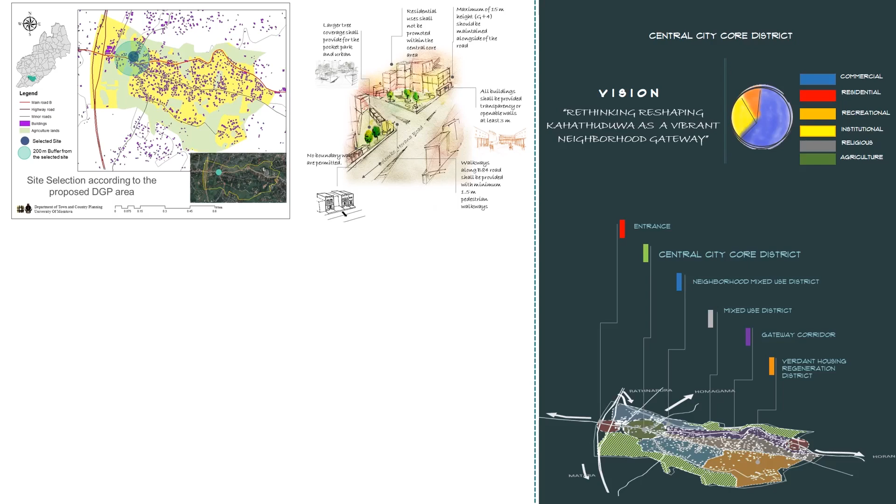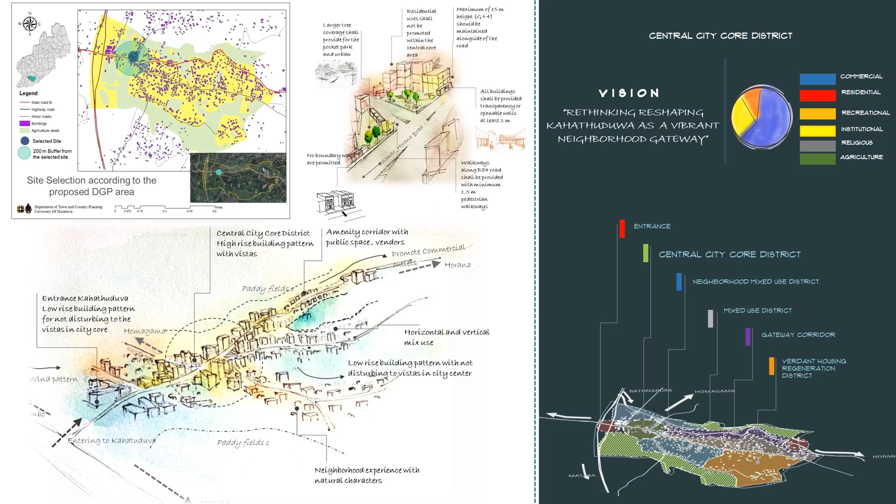Understanding this development pressure, a development guide plan was formulated to regulate development activities. According to this, the selected site is located in the central city core district, which will be the key commercial and service point of Kahathuduwa. It is expected to have a convenient and active city core while accommodating a range of commercial activities.

Considering the entire Kahathuduwa area, these are the adjoining land uses.

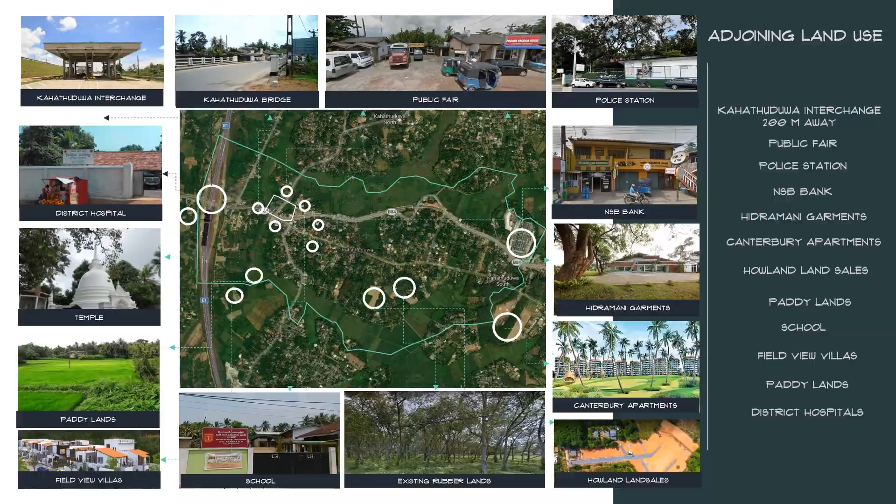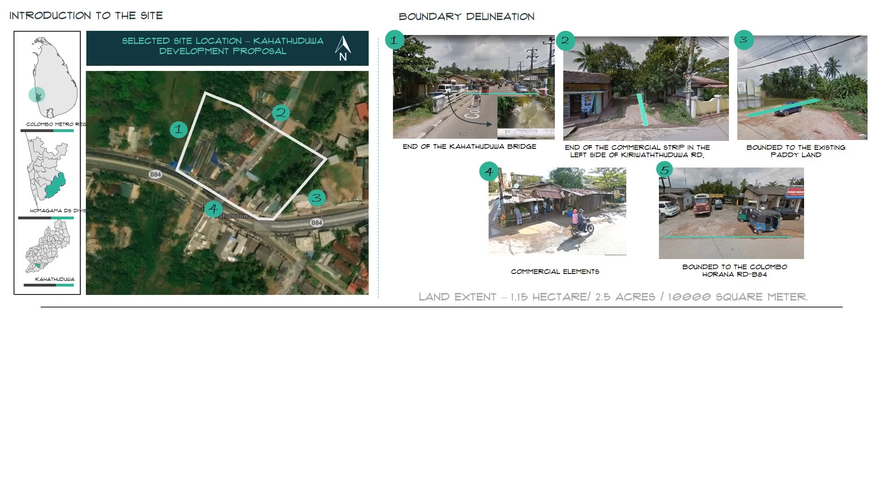The selected site is a 1.15 hectare land located beside the Kiriwaththuduwa road. The site, which includes an existing public fair, is owned by UDA, while the other side is owned privately. These drawings emphasize the existing condition of the site. Facing the Colombo-Horana Road, the land is occupied by the existing public fair of Kahathuduwa and some retail activities.

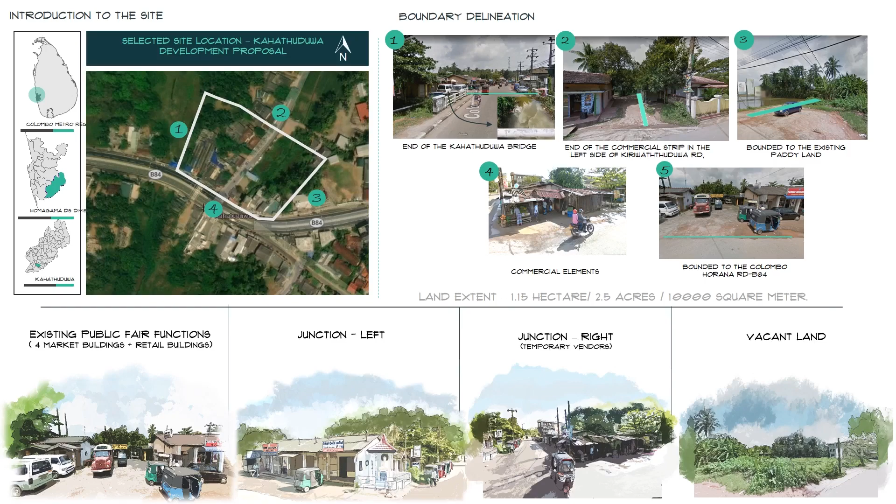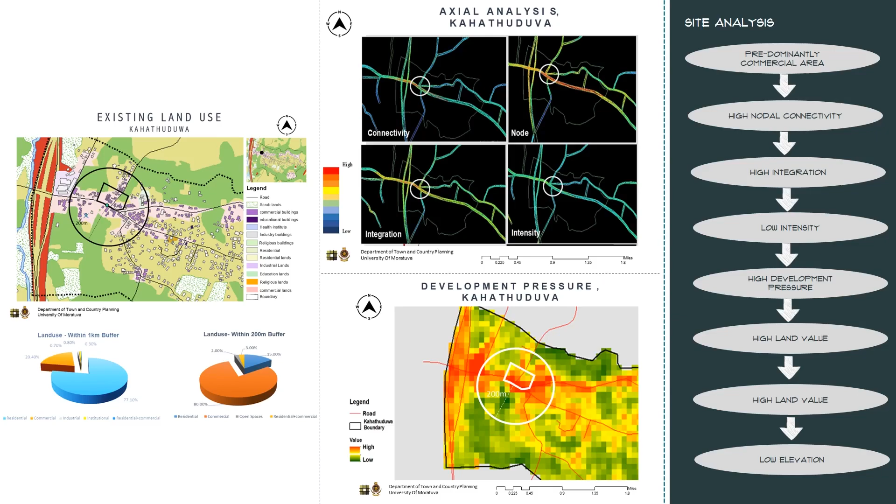Moving on to the site analysis, more than 80% of the existing use of the selected site is allocated for commercial activities. Considering a 1 kilometer buffer, 20% of the total land is allocated for commercial use. The nodal connectivity and integration of the site is comparatively high, though we can see less intensity in certain areas. According to the DGP, the site is located in a place of high development pressure with potential to develop further in the future.

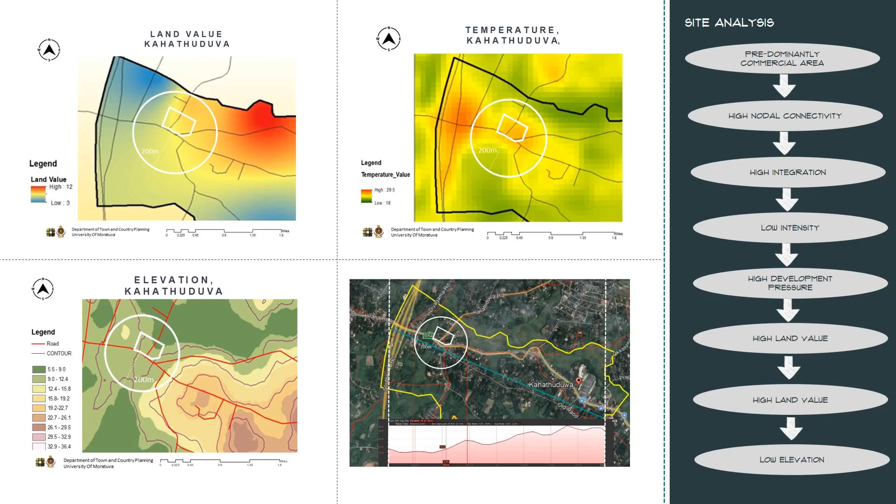The land values are drastically increasing within the last 2 decades. Considering the environmental character, the temperature of the site is comparatively high and this land plot is located in a low-lying area.

Accordingly, 3 alternative proposals were evaluated to select the best use for the selected site. The fitness for the DGP, ability to cater to the future development trend, and potential impact on neighborhood areas are some key concerns. After evaluating them using multi-criteria analysis, Commercial City Centre Development was identified as the best proposal for the site.

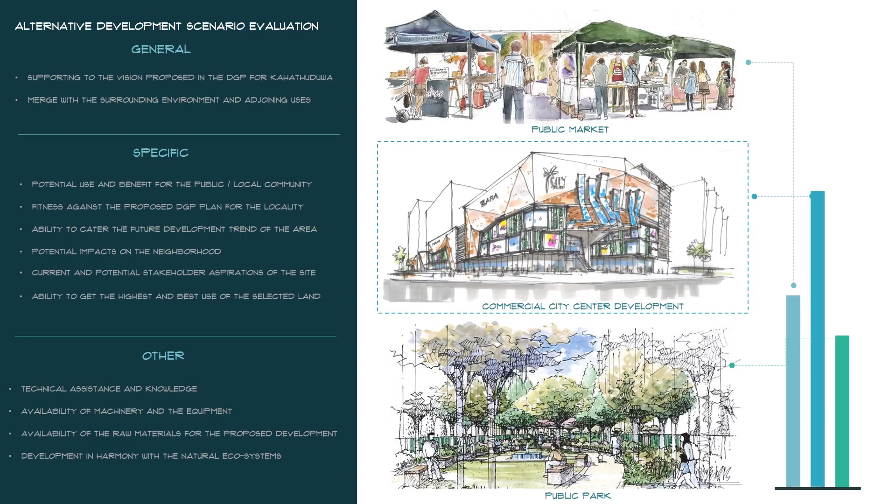Moving on to the need for this project in Kahathuduwa, as previously said, this site is located in a strategic location. Proposed transportation development, increase in residential demand, and apartment concentration reason out the need for upgraded commercial activities in the central city core. Moreover, high consideration has been given to the central city core, where the plot coverage is 60% with a maximum height of 15 meters.

The high concentration of population will demand high quality commercial and service utilities. Moreover, there is a need for harnessing a sense of place, ensuring public recreational facilities for both residents and outsiders. But in the existing situation, lack of commercial and service facilities, inadequate open spaces, inconvenient access for day-to-day shopping needs, and linear ad hoc development can be seen as the problems of the selected site.

Understanding the future demand and the gap, 3 project components will be selected to develop in an integrated manner: to develop a node as the main landmark, to provide convenient access for high quality commercial and service needs through a city centre development, and to provide quality open spaces integrated with the surrounding environment. These are the main 3 components of the project.

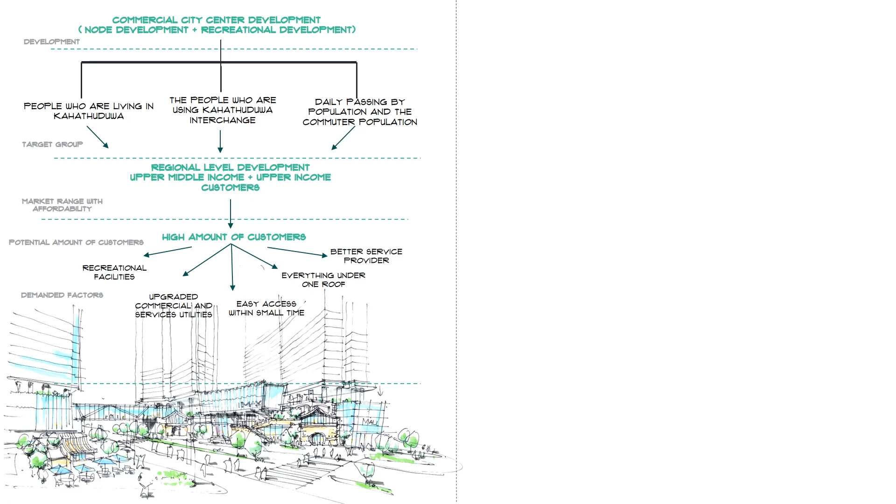Accordingly, this will be a regional level development which serves residents, Kahathuduwa interchange users, and the daily passing-by population. The demanding factors will be recreational facilities, upgraded commercial and services utilities, and to provide everything under one roof.

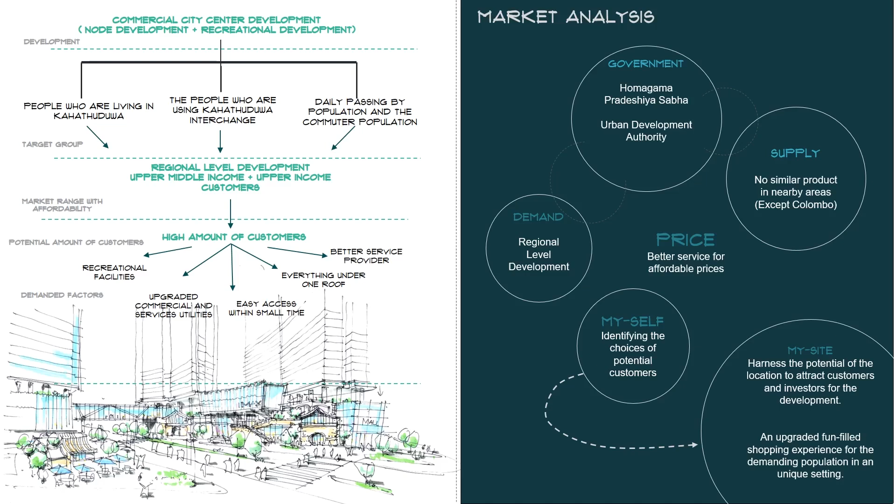There is no similar kind of service provider in the nearby area except Colombo. By analyzing the supply gaps, it is expected to harness the potential of the location to attract customers and investors, and to ensure a fun-filled shopping experience for the demanding population.

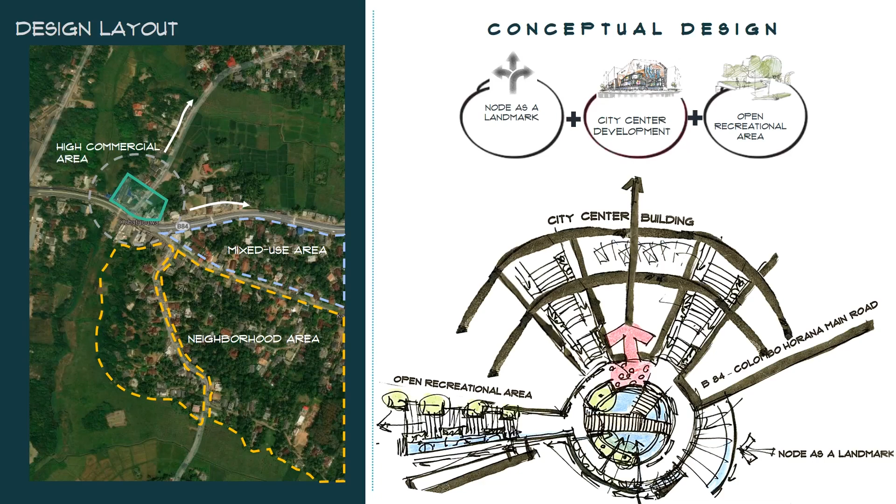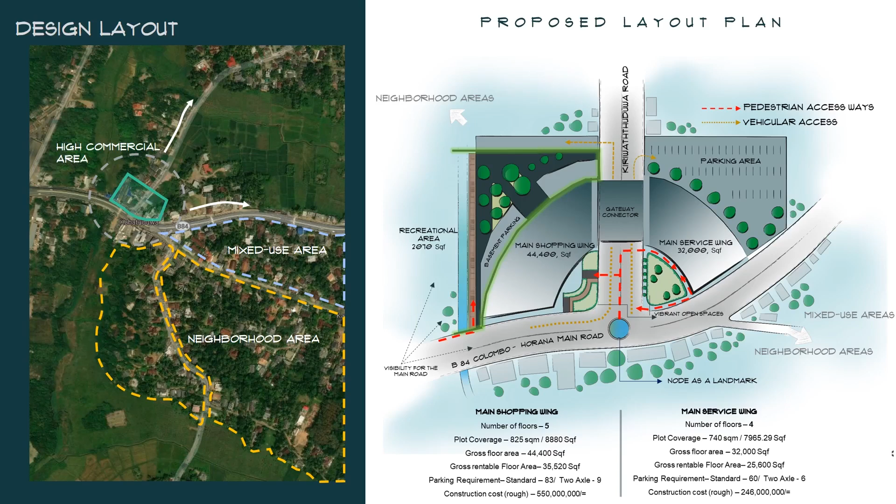Considering the proposed layout plan, there will be two separate buildings connected with a gateway connector. The main shopping wing, the main service wing, the proposed recreational area, and the node development with Kiriwaththuduwa road widening are the main elements. The proposed pedestrian access, walkways, vehicular access, and parking arrangement is visualized in the layout plan.

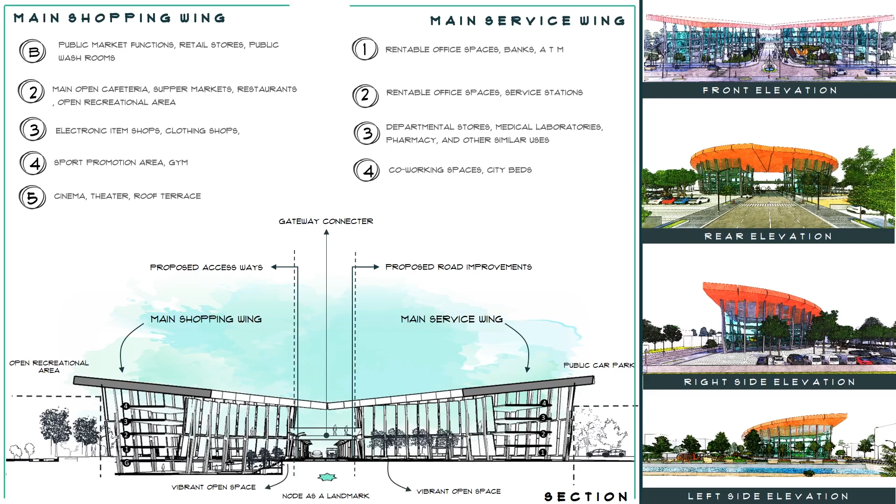This is the site cross section which shows the integrity of the node: city centre wings, public car park, vibrant open spaces, and the open recreational area with the canal. These are the uses allocated for each level. The main shopping wing will have G+4 levels, whereas the proposed service wing will consist of G+3 levels.

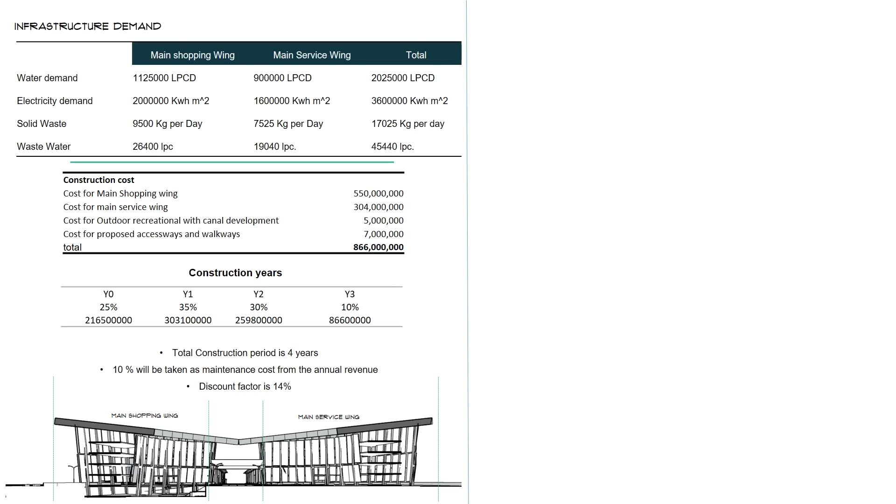The infrastructure demand is calculated as per the standards. The main cost components of the project are considered, and there will be a 866 million cost investment for this project. According to the financial statement, this project will have a 27.74% internal rate of return.

The public-private partnership has been selected as a possible investment mechanism. Accordingly, the land, consultant services, and professional fees will be borne by the UDA, while the private investor does the construction of the project, and this will be based on a 49-year lease.

Considering the scale of the development, there should be a social impact assessment. The identified stakeholders will be impacted both positively and negatively. Thus, a SIA is needed for this project.

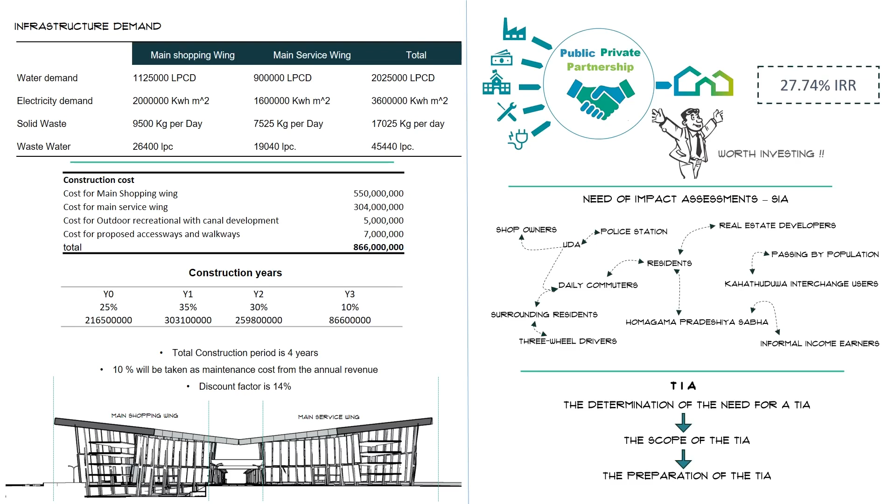Moreover, as per the UDA regulations, commercial spaces exceeding 10,000 square feet and facing a national highway are required to do a traffic impact assessment. So there is a clear determination of the need for a TIA.

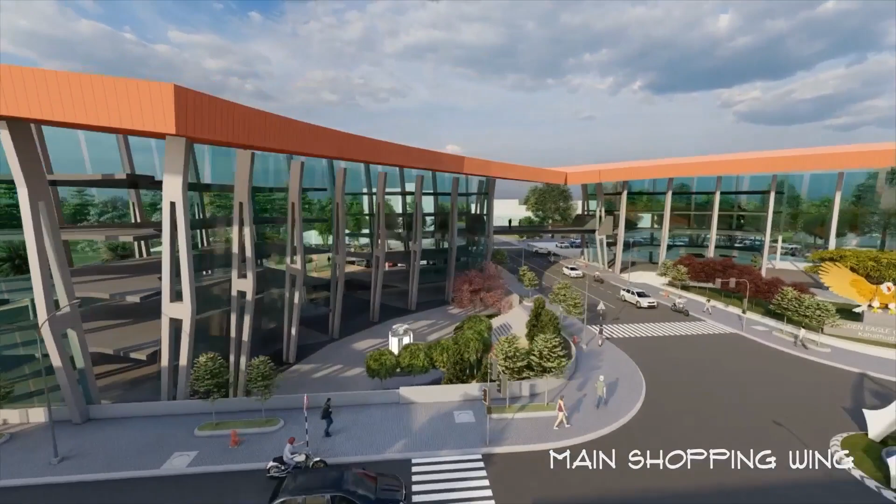The overall site plan is formulated while adhering to the DGP guidelines, with 60% plot coverage, a maximum 15 meter building height, and a maximum floor area ratio of 1 to 2.5, with an upgraded road network.

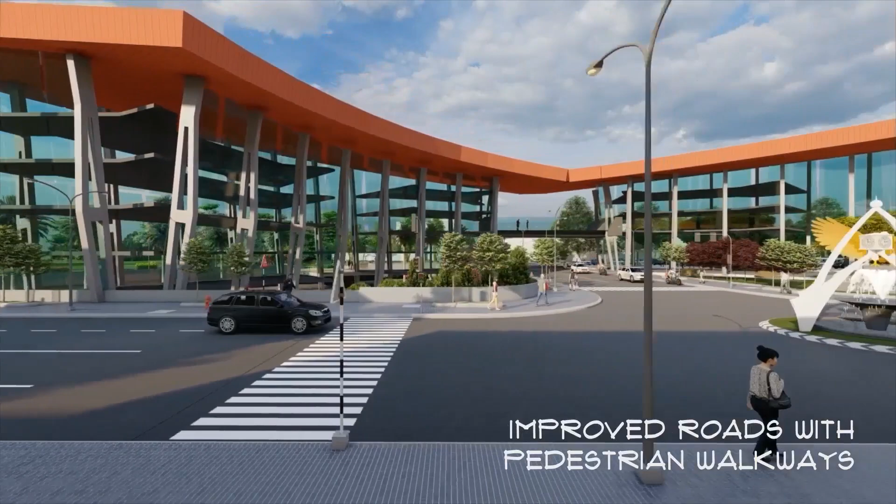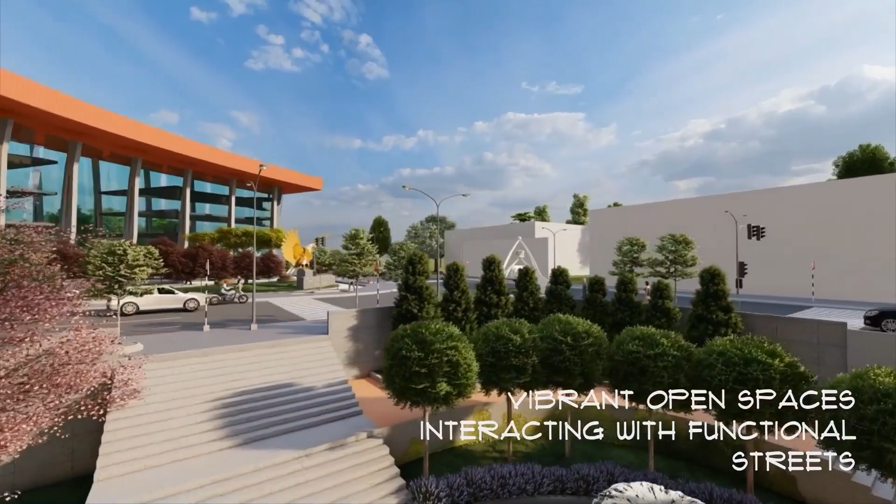It will provide 1.5 meter pedestrian walkways to upgrade walkability of the area. The vibrant open spaces will add scenic beauty, and no boundary walls were used in order to ensure permeability.

The overall site orientation is for the main landmark, and at the junction, the pocket parks in front of buildings will strengthen social interactions and gathering places.

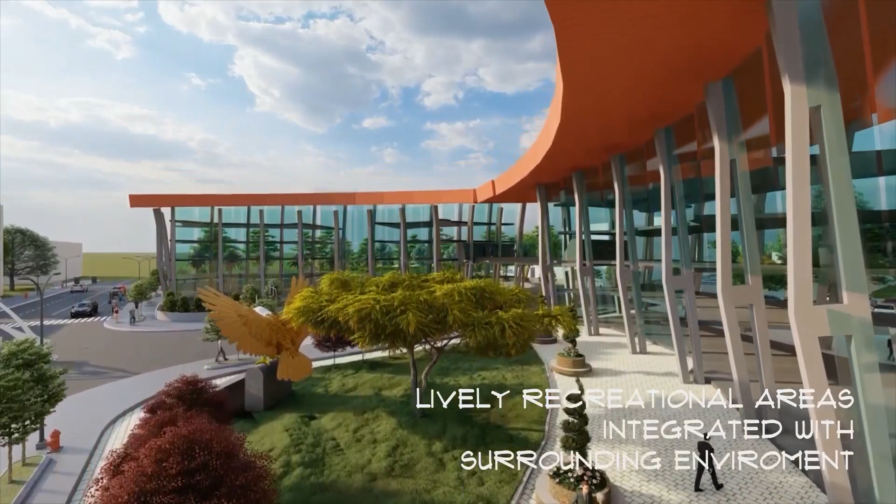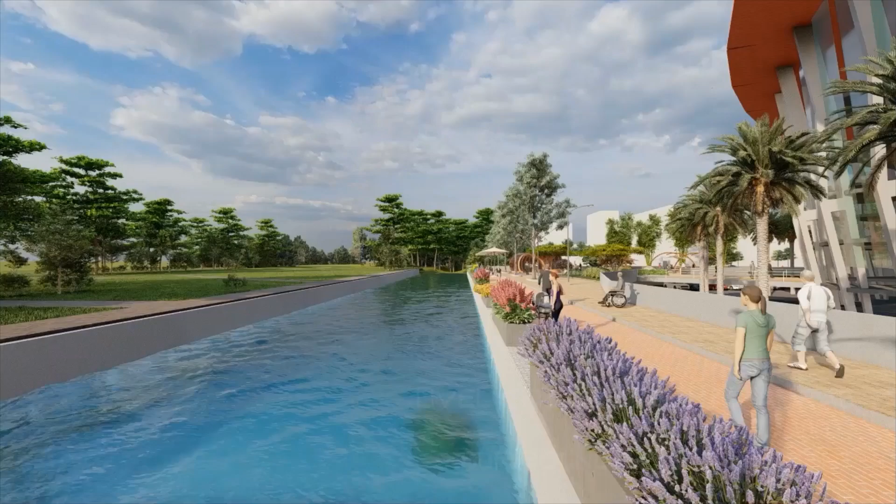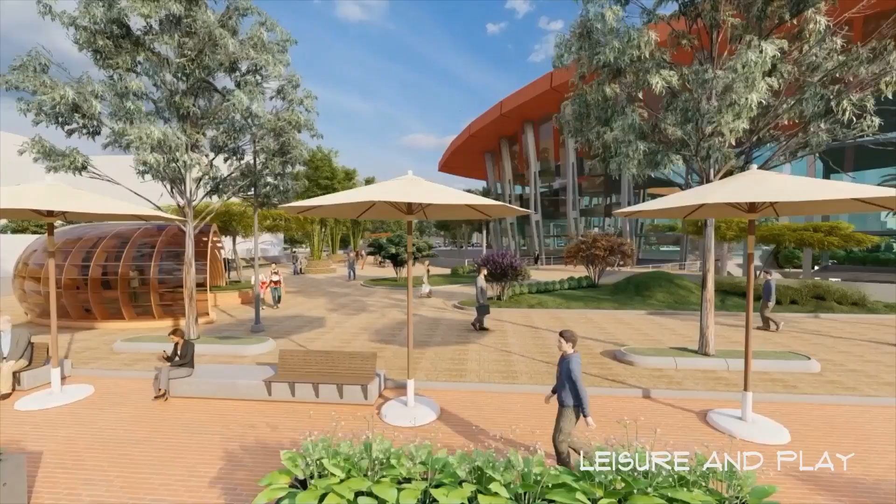The visibility of the canal and the surrounding paddy lands are further preserved and incorporated for the open recreational area. The walkways can be used as an access way for the main shopping wing, and it will serve disability access as well. This vibrant open space will serve the purpose of leisure and play with outdoor seating arrangements.

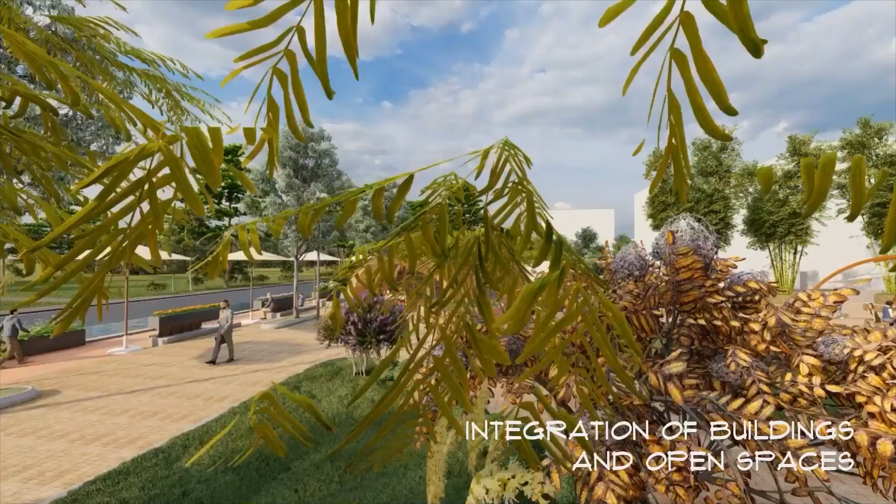This will provide better breathable places, co-working places, and social gathering places for the visitors, surrounding residents, and customers of the main shopping wing and the main service wing. The open spaces will be well connected with the built structures while enhancing visual integrity.

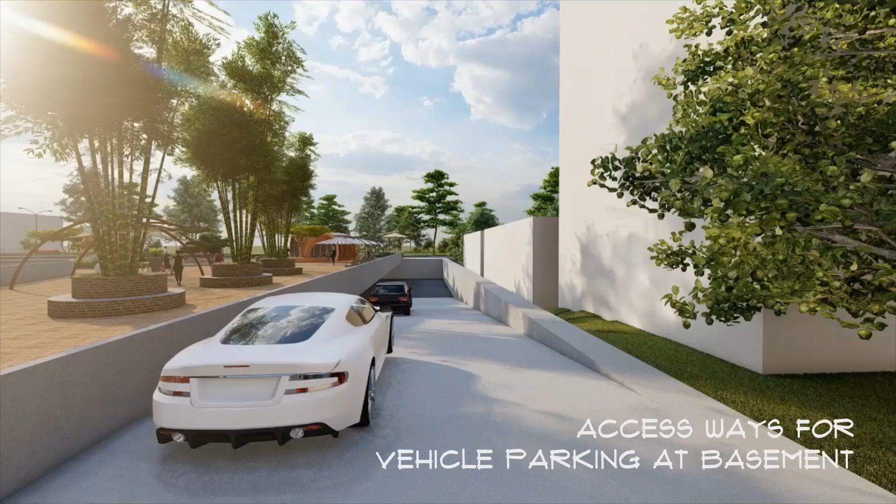The access ways for the basement parking area avoid dead spaces, and maximum effort has been taken to ensure safety of the overall site area. Finally, it is expected to achieve the envisaged live city core area with the proposal. Thank you.